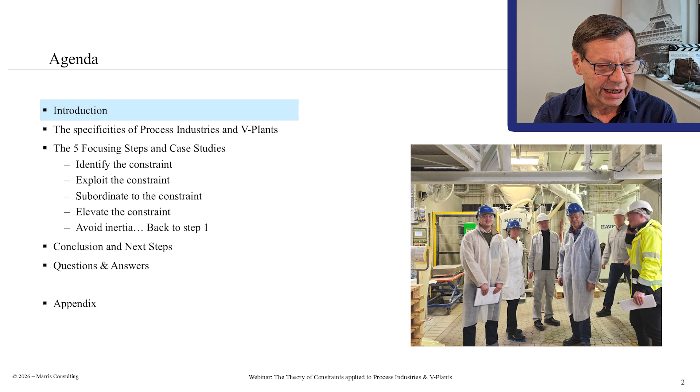Here we have the plan for today. There's Etienne and myself, we were in a V plant quite recently. We'll talk about what's specific about process industries and V plants, and then apply the 5 focusing steps one by one, and conclude and get on with questions and answers.

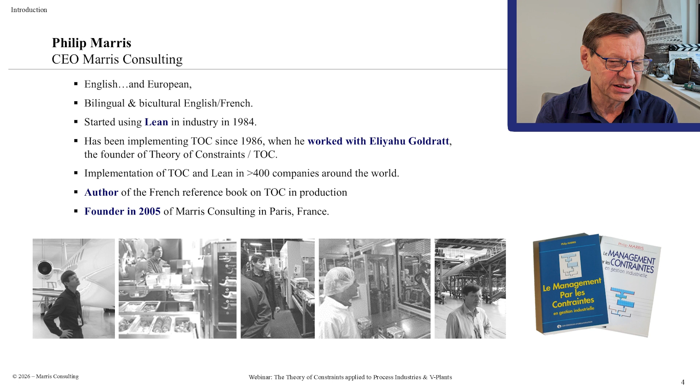I'm Philip Marris, CEO and founder of Marris Consulting. I'm English, but we're based in Paris, France. I started my operational excellence journey with Lean, as we call it today, in 1984. I've also been implementing theory of constraints from a couple of years later when I started working with Eliyahu Goldratt, the founder of the theory of constraints. My world has been mixing essentially those two things and other things into solutions for all kinds of industries, over 400 companies throughout the world, and I founded Marris Consulting 20 years ago.

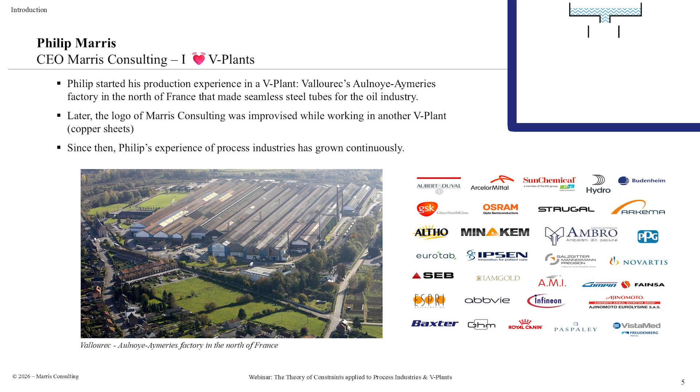This is close to my heart today as a subject, because if I know a particular kind of business better than others, it is V plants. My first job was in that factory in the north of France, making stainless steel seamless pipes. My first flat or house is down there in that picture, so it brings back fond memories. I started in a process industry and went on a bit later designing what is the logo of Marris Consulting in another V plant.

So it's close to my heart because they're different environments, aren't they, especially when you have a lot of molten steel and all these sorts of big cathedral-like factories. I find them particularly exciting and interesting.

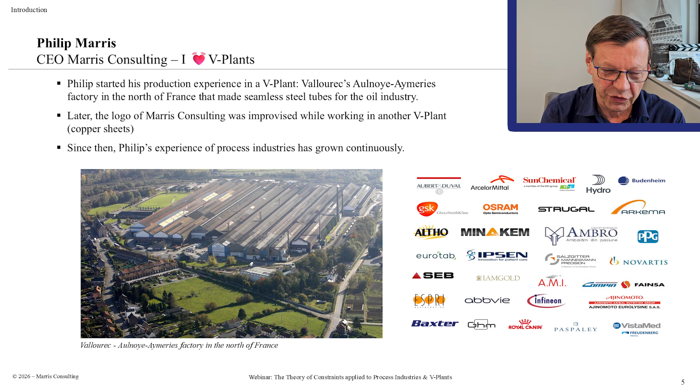Hello everybody, my name is Etienne. I will present with Philip today. I've been working with Marris Consulting over the last 10 years. We do not just work with process industries, we also work with discrete manufacturing. I've had projects about maintenance, repair, and overhaul of aircrafts. So many different topics, but I've learned quite a lot working with chemical factories around the world.

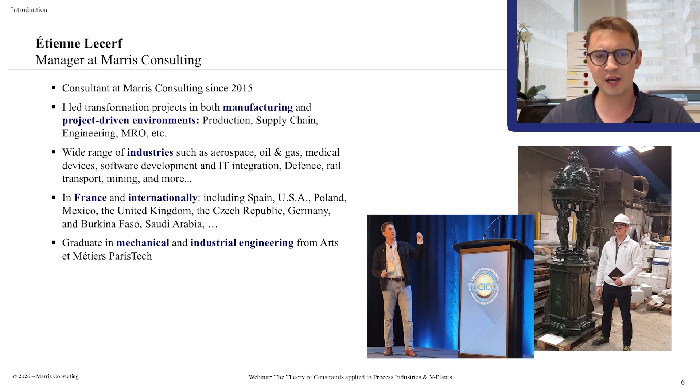That's why we wanted to share with you what we've done and what we've learned about process industries and what we call V plants. Today will be about how to apply the 5 focusing steps in this kind of environment. We've been doing that with many different companies in France, but also in many other countries in Europe and even more exotic places.

We've gathered a few case studies that we want to talk about. Here you have a sample of our clients, not only process industries, but many different types. Today we want to talk about process industries and V plants. As I said, we work with process industries, but also with classic assembly lines where lean manufacturing really started, and we work a lot with job shops and companies that deal with projects.

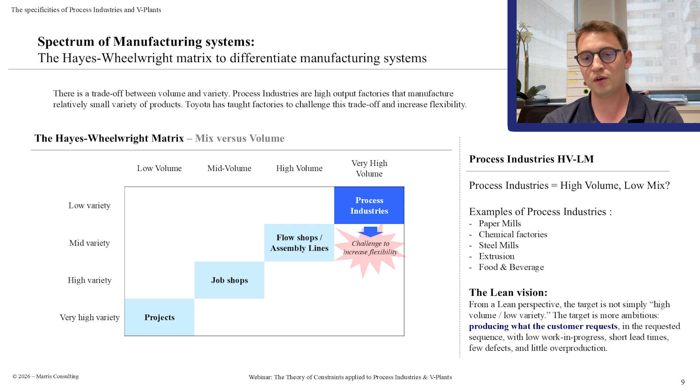Here's one way to summarize the different kinds of industries: the high volume, mid volume, and low volume ones, and the ones that deal with low variety of products versus high variety of products. On this matrix you can see the different types. Usually the challenge when you are high volume is to increase the flexibility of the line to really stick to customer demands, and that's one of the things we will discuss today: how to increase the flexibility of these process industries that usually deal with very high volume.

V plants are part of the VAT model of the theory of constraints, sometimes also called VAT and I. These letters show what the flow of product is. Watch out, it's special in the sense that the flow goes upwards, that's to say raw materials or components are at the bottom and finished goods are at the top. So we're talking about V plants, where there are a few different raw materials compared to a very large range of finished goods.

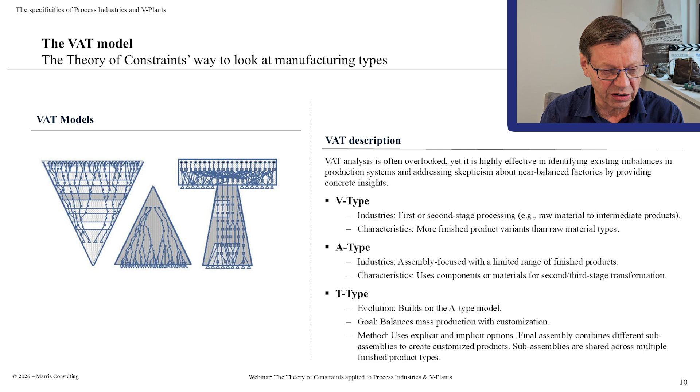A plants, assembly lines, are the opposite: lots of components with a very limited range of finished goods. T plants are a modern evolution of the assembly line where you try to compensate for having a limited product range by using options and variants of components to produce a wide range of products, hence the T shape. Typically car assembly lines, for instance, are that sort of product.

Often these industries are some of the oldest in the world, in glass manufacturing for instance. So they have this heritage, which can become a handicap. They were ignored by IBM when IBM invented bills of materials and routings, because you don't assemble things—or not much assembly goes on in a V plant. It's the opposite: you deconstruct, you decompose stuff as it goes through the process. One type of raw material will be transformed into many different types of finished goods, so it's a disassembly process, if you wish.

So that's a real problem. The culture has been mostly to maintain low cost per unit and not be reactive to customer demands, and we often find low on-time delivery performance. That's a big problem we will talk about. The resources lack intrinsic flexibility—think of things like heat treatment ovens. You can think of all the magic you want, but taking one from 500 to 600 degrees is not going to happen in a flash.

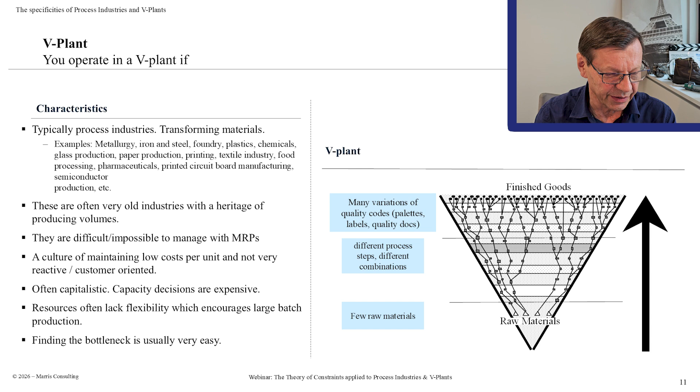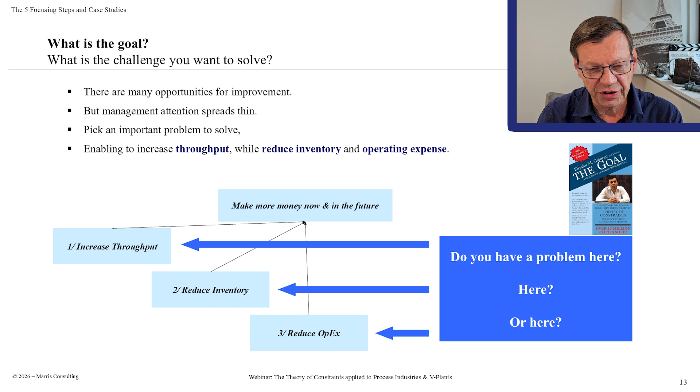So there's an issue there, and finding the bottleneck is usually fairly easy in these environments. Please don't try to solve all your problems at once—stay focused on one particular problem. Choose your fights and focus on those to get your wins. We see too many organizations that are unfocused, trying to do a lot of different things at the same time.

Once you've decided what to do, there are five focusing steps, which I'll present very quickly—have a look at the videos we have that discuss this in further detail. Number one: you find your constraint. Number two: you exploit it. That's to say, you go immediately to this constraint, treat it as a VIP resource better than the others, and you should be able to get a lot more performance out of it when you do that.

Subordinate to the constraint—make sure every decision is taken according to that constraint, and in particular that means learning to avoid local optimums and learn to stop working. Step four: elevate the constraint—get even more out of it by eventually investing or hiring people or whatever. Keep going until eventually the bottleneck moves. Beware of inertia, and then off we go back into this continuous process of improvement.

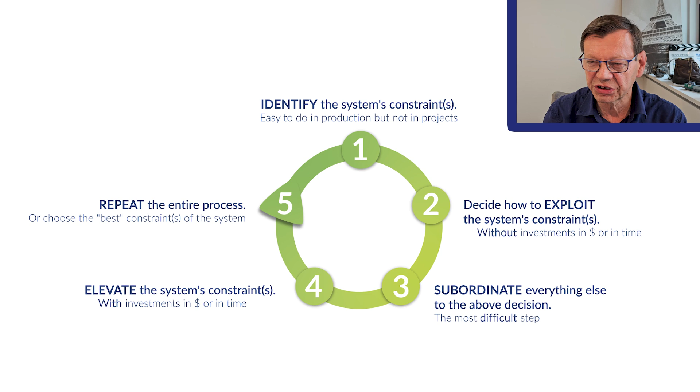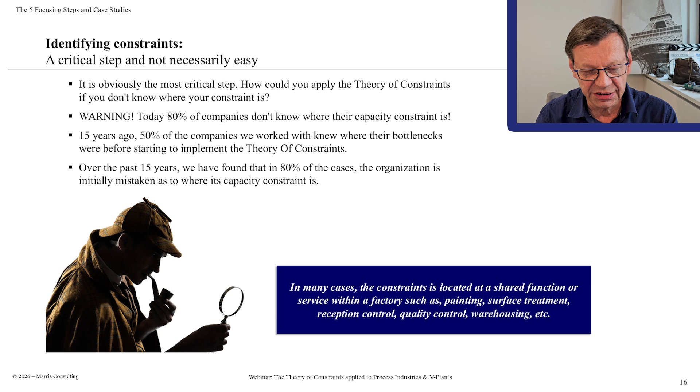For those who haven't looked at the video we have specifically about finding constraints—watch out, people do tend to get it wrong, and there'll be an example coming. They confuse where it should be and where it is, and that sort of stuff. It's more and more often in support functions, for instance in quality departments—we're finding that more and more. Watch out, the identification of constraints can be a problem.

Yes, exactly. So Philippe, you showed the V of a V plant. What we do usually in process industries is first make sure we distinguish the situation for the different lines. You may have some lines that are heavily overloaded with real structural bottlenecks, while others have a lot of extra capacity, so the situation can be very different from one branch of a V to the other. The other thing is you may have some common resources between these branches, as Philippe mentioned, for example the quality department. Usually the quality department is not monitored the same way as the other resources in the ERP, so it's usually more difficult to look at the queues of work that they have.

You don't have just one constraint for the whole factory, except if it's one of these common resources like quality control—but there's also quality assurance, more and more in pharmaceuticals or in industries like food and beverages, where you have to document everything that you do. Then if we look for these bottlenecks in process industries, we usually find a few common points from one factory to the other. We usually see they're mis-synchronized with the market because of the changeover constraints that force these companies to run big batches, big campaigns, to save time on changeovers. They can be hidden, especially in the chemical industry—because when you enter these kinds of factories, you just see pipes and vessels.

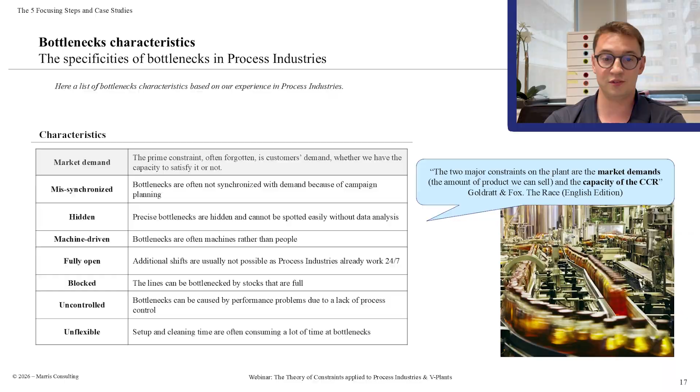I will not explain all the details, but just to see that from factory to factory, we see over and over approximately the same situations. But it's always important to distinguish the different lines and situations. And when you deal with big factories, this can get complicated because of all the lines that run in parallel. Another challenge in these factories is that you can steal the raw materials or the semi-finished goods from one resource to the other. So again, we will talk about it, but the synchronization is important.

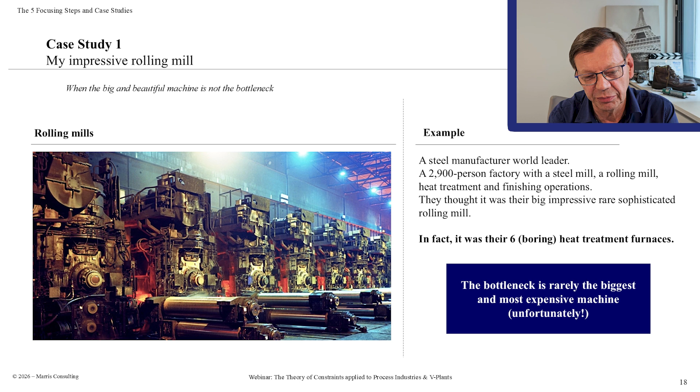First example, maybe Philippe. This is a large steel factory with nearly 3,000 people. This one is in Belgium. They wanted to apply the theory of constraints, so they said, here's the bottleneck, and they showed us their most expensive, beautiful, impressive-looking machine, their rolling mill, right? And so they said, this is the bottleneck, and this is what we're going to do.

So they were wrong. They were confusing where it should be and where it was, okay? In practice, when we looked at the process, it turned out to be the very boring heat treatment ovens that were the constraint of the system, not the rolling mill. They were confusing where the heart of their business was, the most complicated part, the most honorable part, and where the capacity constraint was. So watch out.

Very often people are looking at the complexity of their business in terms of what they do, right here, the rolling mill, but it's not necessarily where the capacity constraint is.

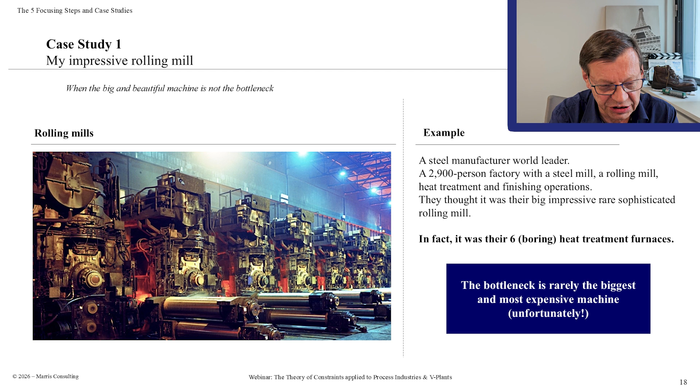So they call me and say, we can't work it out. We have excess capacity everywhere, and yet we can't deliver on time. What's the problem? So we had a look. It was a bit difficult to find this one, because normally you look for the biggest queue at one particular spot. And here it was spread in many different areas, because the constraint was quality control.

And I mentioned it earlier, that's why I took the second example with quality. It's so often the case today. About half our implementations or analysis of industry these days leads to the fact that quality is a capacity constraint, a bad capacity constraint. It should not be. You should have to get rid of that constraint by doing whatever is necessary, because it's very bad performance in general.

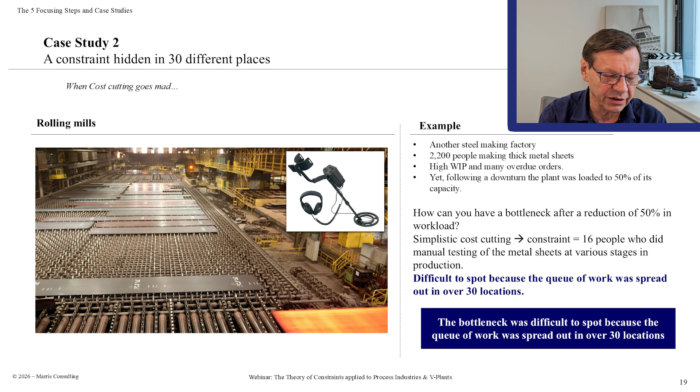It was the people who walked around the factory with these things that looked a bit like metal detectors, checking the surface of these sheets of metal to see if they were okay. These 16 people out of 2,200 were constraints holding up this huge, very expensive, very capital-intensive factory. So it's completely crazy. Okay, so watch out.

Quite often we find hiding in quality, not necessarily the control of the machines, but the paperwork, also the management of quality. Finally, this case here, we worried about including it because people are going to say this is stupid. It's happened to us several times, so that's why we thought we had to say it, right? Quite often, it depends from one industry to another. The finished goods can take up quite a bit of volume, and the factory can produce quite a lot of cubic meters and tons per hour, per day, per week and stuff.

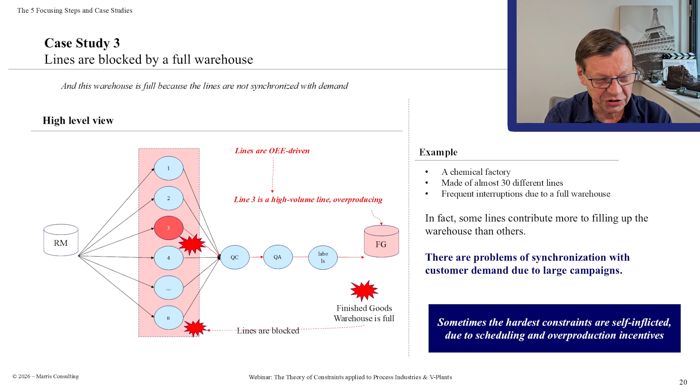Quite regularly, we find that the finished goods warehouse ends up being full. And when it gets completely full, they have to stop the factory. This sounds pretty stupid, but if we're mentioning it here, watch out - we've seen this too often. People's focus on productivity and local optimums is pushing people to this crazy situation where they have to stop production because there's nowhere to put the stuff they're producing anymore.

We just mentioned this case where some of the lines had the capacity to run faster than market demand. So they were building inventory and filling the warehouse with materials that were not necessary in the short term to satisfy market demand. Doing so, they were blocking the other lines. That's why it's sometimes really tricky to focus locally on the OEE of these different lines without considering the overall situation.

When we work with process companies, process industries, they usually use the OEE as a KPI. The OEE is made of three components to assess whether the equipment has good availability, good performance, or good quality. But the problem with this aggregate is that it's just a number - we usually have to get back to the different components of the OEE to really understand the situation. We don't want to apply it blindly on each and every line without first making a distinction between whether or not the lines have an internal bottleneck.

Do they have extra capacity compared to the market demand or not? We don't want just to increase OEE without consideration for the demand, customers' demand. And then we want to really understand whether it's a problem of availability or really important quality, or minor stoppages and performance.

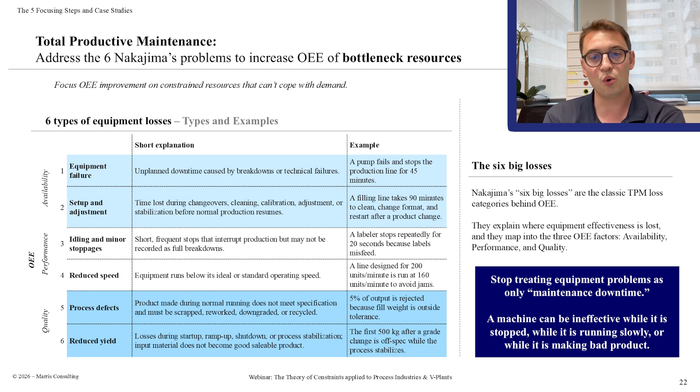Please don't use OEE everywhere, even when there's enough capacity.

Then when we talk about exploiting better the bottlenecks, in process industries, one of the main components is the changeover duration that can be challenged thanks to tools like SMED, but also scheduling. If you look at the changeover matrices where you list the changeover durations from one product to the other, you can find that some sequences are much better than others.

So what we like to do is work with the teams to see if there's a better sequence, a better order from product to product, in order to minimize the changeover durations when it makes sense. For very complex matrices, you may need more sophisticated algorithms, but usually it's sufficient to list the main parameters and see how to sort them to identify the best order. Be aware that it can be very powerful.

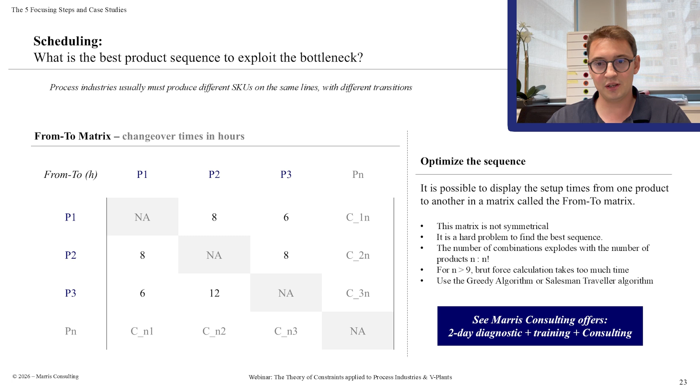And then there's the reduction of changeovers thanks to SMED. SMED means single minute exchange of dies. It's well known in industrial companies. We usually find that in process industries, it can be improved a lot.

What we usually do is create Gantt charts of the activities. We go into the details of the different activities and segregate the tasks that can be done before or after the changeover from the ones that must really remain during the changeover, and then we optimize it. So with a Gantt chart, taking into account both the logical dependencies and the resources, you can improve it a lot, usually without investment.

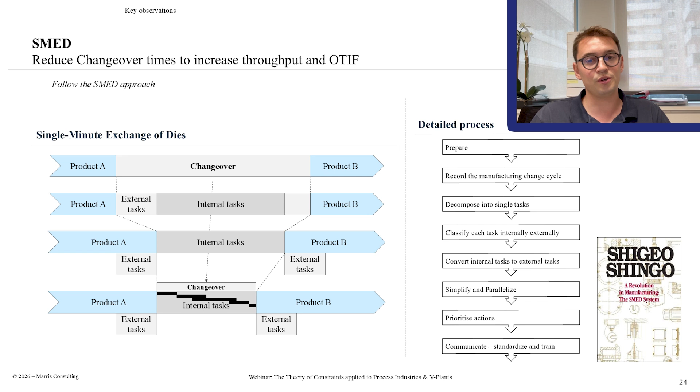But in process industries, because it's a lot about Capex, you can go the extra mile with extra investment. We will talk about it.

Regarding the scheduling of these factories, there's one technique that enables you to level the load but also improve the sequence of products, which is called the product wheel. This is usually well known, for example, in the paint industry, where you prefer to go from light to dark, but you have the same in other chemical industries or even in the iron and metal industries.

So the idea is to create a fixed sequence of products and define a cycle - how often you will produce each product. You're not forced to produce every product within one wheel, within one cycle. You can decide, for example, to produce some products once every second or third cycle.

We've created a simulator, which is usually very useful to understand the situation of the line and the impact of the changeovers on the load versus capacity, the impact of sizing this cycle, different cycles, different periods between two products.

Understand also when you should produce each and every product on these lines so that you level the load on the line. This is very useful also to see if you have a constraint or not on one line.

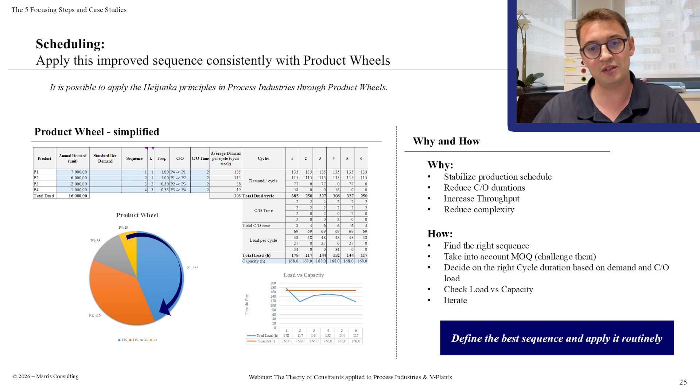To see if just changing a few parameters you can get back to a better situation and satisfy the market demand better. When we talk about exploiting bottlenecks, there's another topic that is usually not addressed, which is finance and throughput. So how many euros or dollars do you generate per bottleneck hour? That's where it really makes sense to cross operational data with financial data to be able to identify the products that generate the most cash flow compared to others.

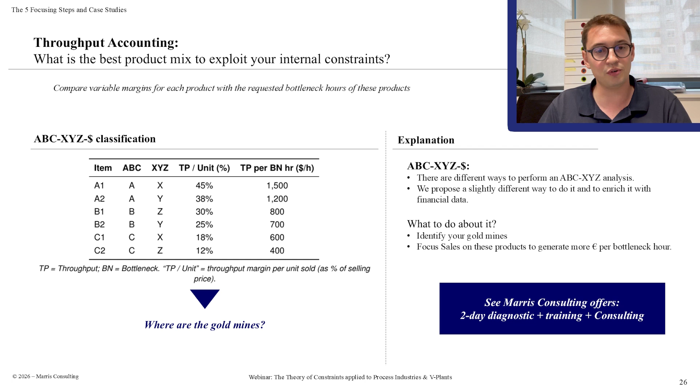Basically, we look at the variable margin and compare it with the rate at the machine to be able to compare the different products and see if you have gold mines within your product portfolio. So this was about how to exploit the bottlenecks better.

These are just a few ideas, but in the theory of constraints, we talk a lot about subordinating to this constraint. You can have internal bottlenecks, so resources that can't cope with the market demand, but sometimes you have just a market constraint. You have enough capacity, and the challenge is to stick to the market demand and deliver on time.

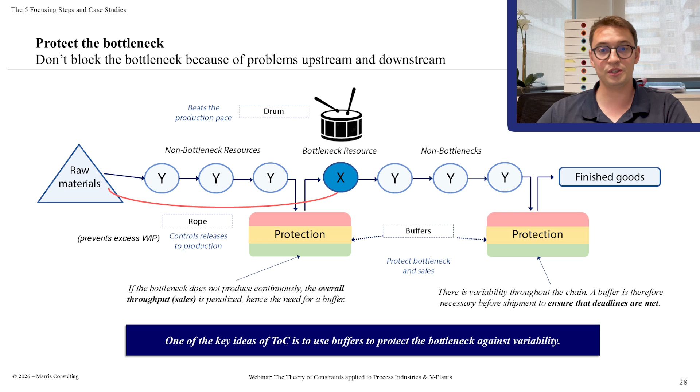Really satisfying customers with a good on-time-in-full is usually underestimated because of all these difficult constraints, changeovers, campaigns that you have. The theory of constraints is a lot about getting back to satisfying customer demand and increasing the OTIF. The usual way to do that is to implement a drum buffer rope.

But before that, you must distinguish whether you must produce to stock or make to order, or if you have to do something in between, what we call finish to order. So one of the first steps is to do an ABC XYZ analysis to understand really the patterns of your demand, to see if you have very repetitive products or sporadic demand, and you don't manage these two kinds of demand the same way.

Distinguishing between made to stock and made to order is really critical to be able to satisfy customers and deliver on time. That's where OEE also can be tricky when you want to subordinate to this demand or to your capacity constraints, because depending on whether or not you have extra capacity, chasing high OEE can have really bad consequences.

We mentioned one example: blocking other lines because a warehouse is full, but also because if you just want to increase OEE, one way to do that is to reduce the number of changeovers and increase the size of campaigns. But doing so, you lose a lot of flexibility.

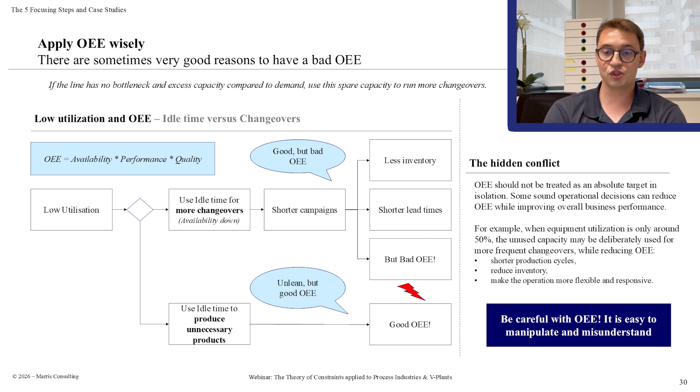This is also a frequent cause of delivering late. If the line has a lot of capacity, the theory of constraints will say don't optimize locally—take advantage of it and just do more changeovers if you have the capacity to do so, to stick to customers' demand.

We also usually have to discuss the economic order quantity. When you study it and look at the details of how it's calculated and how the total cost curve looks, you'll see that EOQ is in fact just a range. It's not a precise number, and you can produce 20% below or even 30% below without having a big impact on costs. It's important to mention that this model is not perfect.

It does not take into account all the costs of holding inventory. It doesn't properly account for problems of expiry, insurance, planning noise, or seeing quality problems too late. So really the holding costs are usually drastically underestimated, and it doesn't take into account the opportunity cost. You can include it in the formula if you want, but usually it's not taken into account.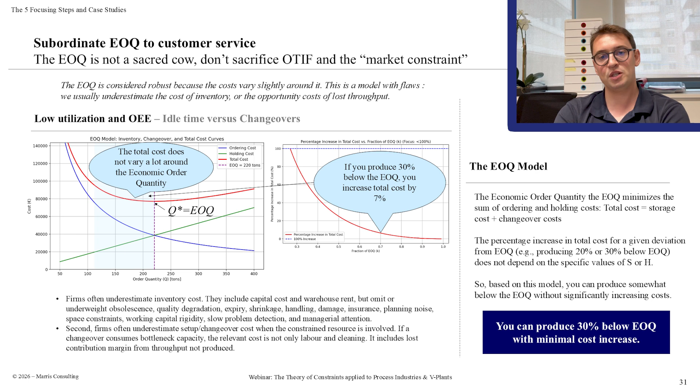So again, it's not a sacred cow, and it must be challenged when it forces you to produce too big a campaign. The last step, or almost the last step, of the 5 focusing steps is to elevate the constraint.

And that's where we talk about really hard investments, a lot of money. That's where we talk about, for example, installing new pieces of equipment or doing things that take a bit of time. That's why we wanted to mention this topic.

It's not really SMED, but it's transitions from one product to another. We categorize it as elevating the constraint because it takes time - you need to validate the new product, you need to market it. Imagine, for example, that you switch from a peach yogurt to a berries fruits yogurt.

You have two different products, and what you can do is take advantage of the transition to create a multi-fruit yogurt. This is common in the food and beverage industry, but you can have it also in the chemical industry. That's something we've done with another company to create a new product and market it.

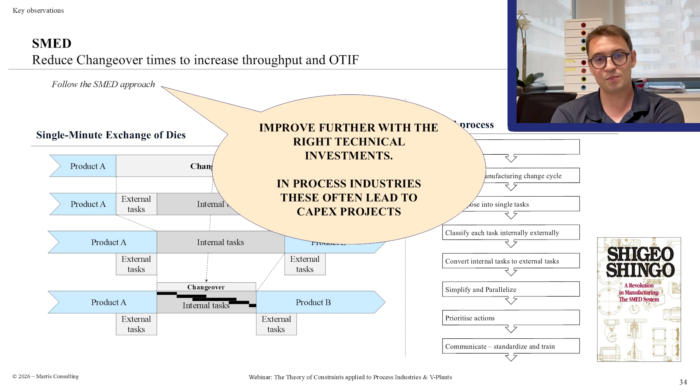And then, as I said, you can go the extra mile with your SMED approach and add, for example, new instrumentation or modify the machines a bit. So that's where we talk about Capex projects.

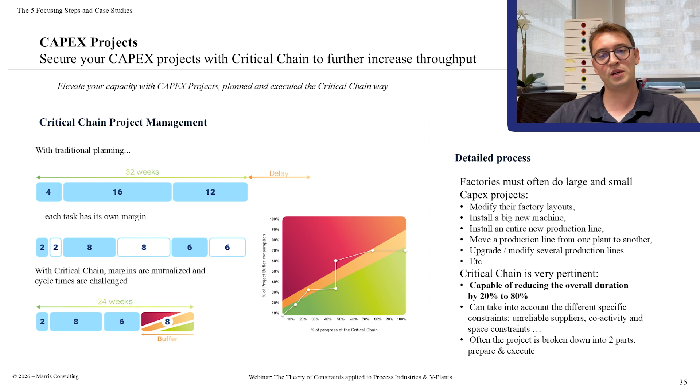The theory of constraints has a very powerful way to manage projects, for example Capex projects. That's something we've been doing with many industrial companies. At the moment I think we're helping companies run four different big Capex projects. We do that with the critical chain approach. We'll do a specific webinar on that topic, but just to let you know it's a different way to plan and then execute these projects.

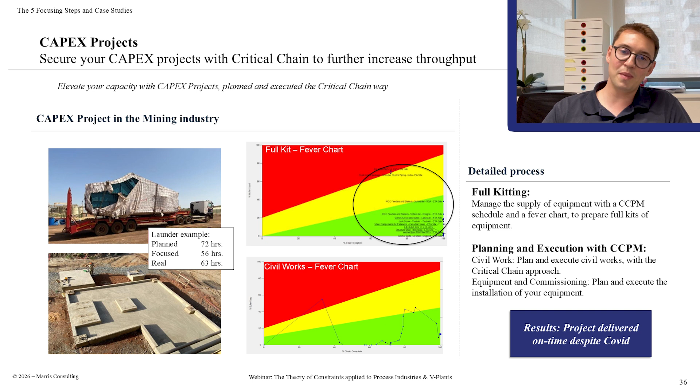One well-known KPI from critical chain is the fever chart. So you have some samples here. This was a Capex project in a mine to install new equipment. This was a Capex project in a pharmaceutical company where they had to install new machines. You see here how the project went.

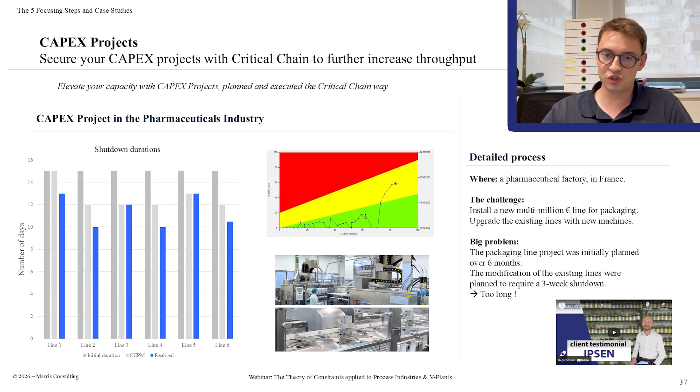The theory of constraints is not just about bottlenecks. It's also about finance, about project management, about strategy and tactics. It's hard to summarize so quickly, and we're probably going to do another webinar specifically on this subject.

It's when you don't have enough work, and therefore some people say the constraint is in the market. There's excess capacity in all your resources. This happens a lot, at least in European industries at the moment. That's why we're working a lot in process industries, for a number of reasons.

These industries are, for historical reasons, often not client-oriented enough. So often we start by fixing the OTIF, right? They have a terrible OTIF of 30% or whatever. They're losing clients because of that. So you need to get back to getting good performance. We did a webinar on that subject, right?

It's important with regards to V-plants because they often need to improve the performance of the quality of their offering, not just the quality of the product, but the quality of their offering - shorter lead times, much better on-time delivery. Therefore you need to look at what's wrong. There might be bottlenecks or problems in the sales process, and your offering is not good enough because the OTIF is not good enough for the reasons Etienne has already mentioned.

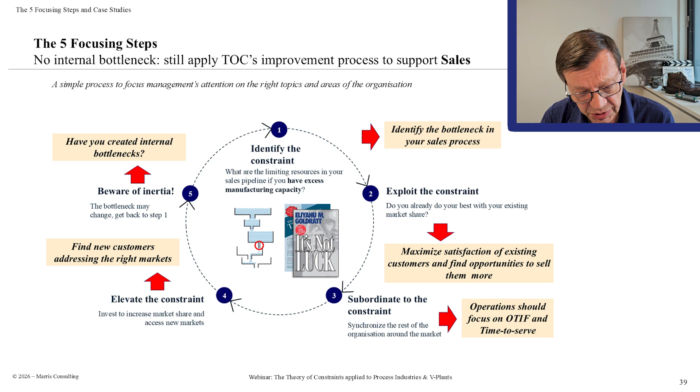Local optimums, too much inventory - you need to target particular markets. Again, Etienne's given a couple of examples, okay? Until you create an internal bottleneck, which is what you really want to do, because after all it's been said several times, we're talking about capitalistic industries. Having a capitalistic industry that's only running 50% of the time is not going to be a good way for making money, is it?

Very often the work is done internally to try and increase the demand from the market on that particular factory. What we usually do, if you're interested in what we've been saying, is to do a diagnostic of the factory. If it's one factory, one site with less than 500 people, we can usually do that in 2 days. At the end of the second day, given our experience, we can present a diagnostic of the strengths and weaknesses of the organization and a roadmap to improve. We have a pretty good reputation on doing that.

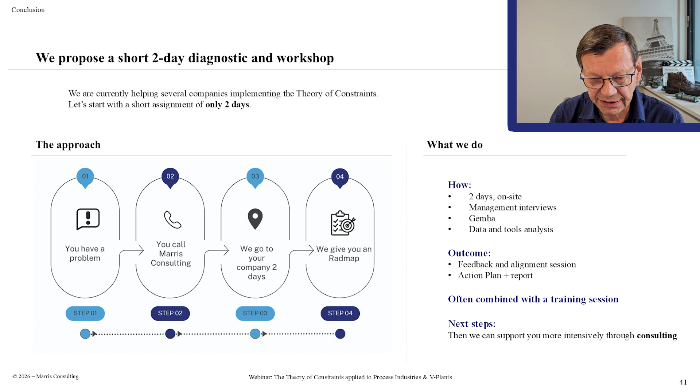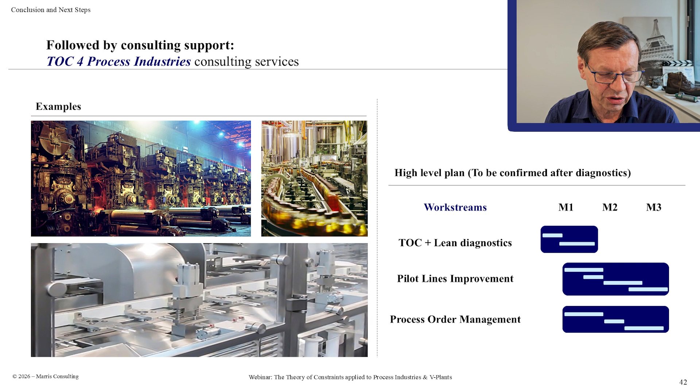We do about one a week, or three a month, and the feedback is really excellent. The diagnostic leads to an action plan. That action plan can be developed either by the client without us or with our assistance. It can be some pilot lines, and we work on things such as process order management, not just what we've been discussing here. Okay, that's it.